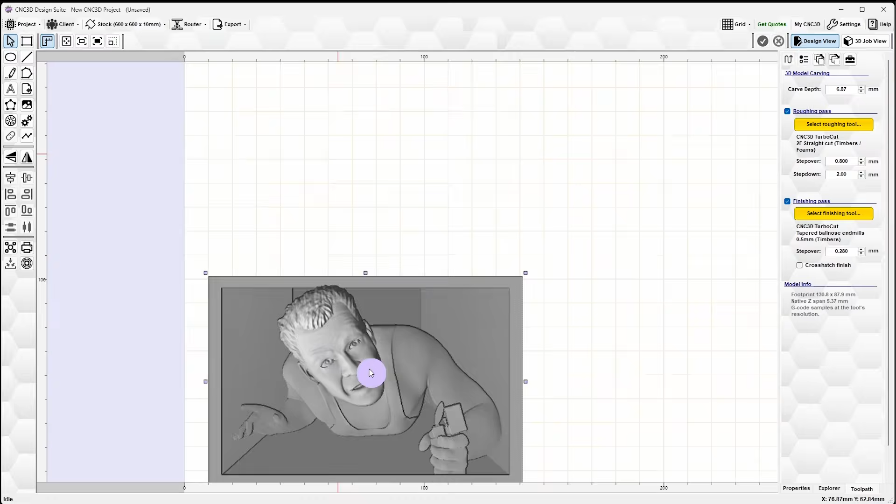Now we can pretty much go straight in and try to visualize this job right now. It may take a little while to render the preview for you because what I'm doing is I'm actually manipulating the STL, but that was actually pretty quick. So let's have a look and see what it's done. And as you can see, this is the actual toolpath here, so it's come along and you can see it's really done a good job of being able to render this.

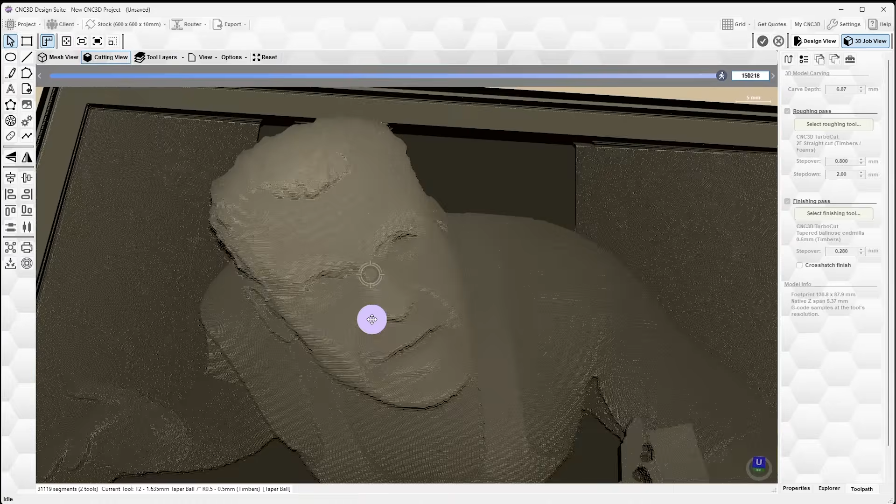Now the overall result should actually be even a little bit better than this overall visualizer here because I've tried to make these a little bit more efficient. Now if we go back into design view, that is very cool that we currently have 3D carvings coming very soon. But I also thought I'd go the next level.

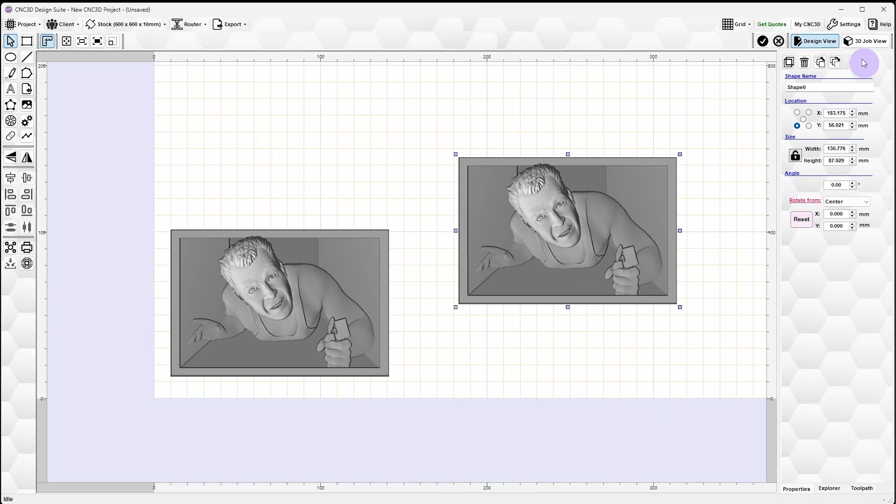So basically I'm going to copy this shape and I'm going to paste it. Now you can obviously choose to, if we go into the properties tab here, we're just going to show the rotation start point, just going to drag that there. You can obviously choose to do any sort of rotation, and you can import basically as many of these models as you'd like.

Now rather than having a separate tool for manipulating the models, I've actually tried to keep things fairly simple. So what I'm going to do is I've obviously applied this rotation, I've obviously shrunk this down a little bit. Let's just go into the Toolpath tab and let's make this say 8mm, so we'll make it even deeper than the other one.

And now let's go into 3D job view. Now this may take a little bit longer to load again. Obviously for each of the 3D models that you do have on your canvas, basically it's going to take time to render those toolpaths because it has to create them. So we'll just see how this one here comes out first.

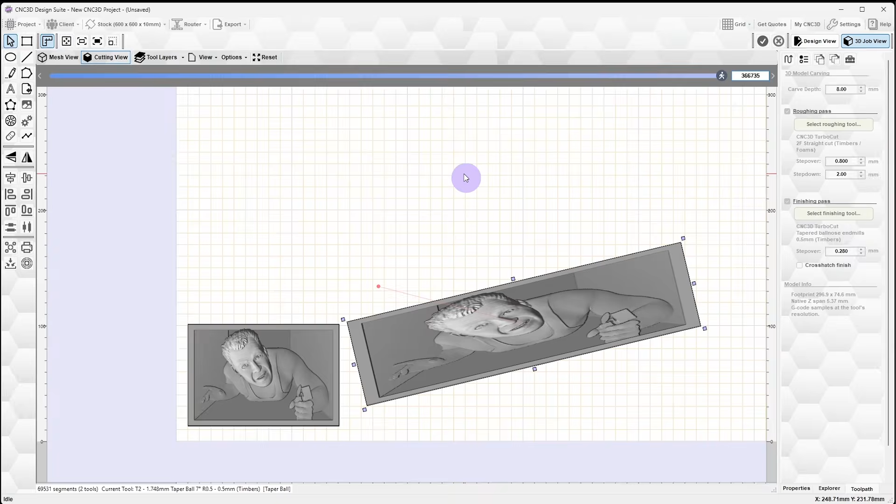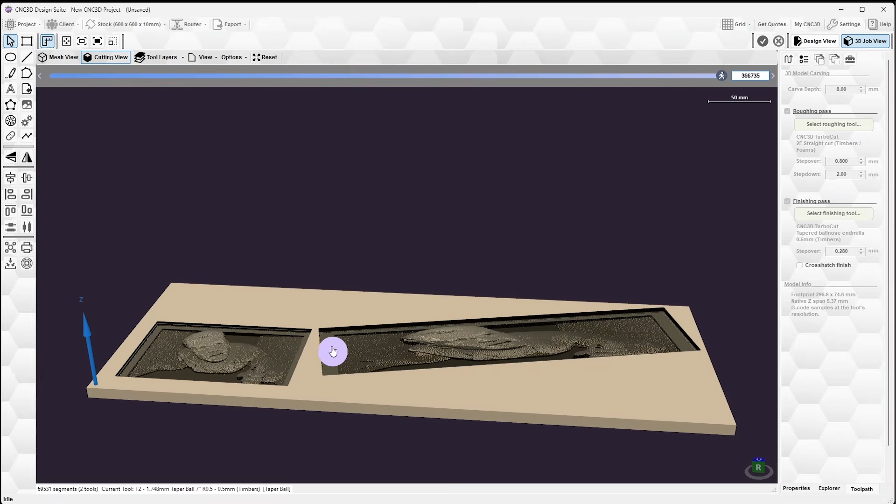And there we go, so that has actually gone ahead and done that for us now. And you can see that it's actually obviously shrunk that down. And if we look at our heights, you can visually see the height difference between the 6mm one there and the 8mm one there, so there is actually a discernible height difference there between them. So it will basically do that 3D carving for you exactly as expected, and you can place as many of them down on the canvas as you want.

Now let's go back into design view here. And what we'll do is we're just going to load up a slightly different project.

It's going to make this a bit easier. I've got this standard router test job here, and I'm just going to flick this into router mode. So this was a jumble of shapes that I used to help me create the toolpathing, so that the way the shape should work is what you see is what you get.

Lighter colors are shallower, darker colors are deeper, and they should respect their overlapping position on each other.

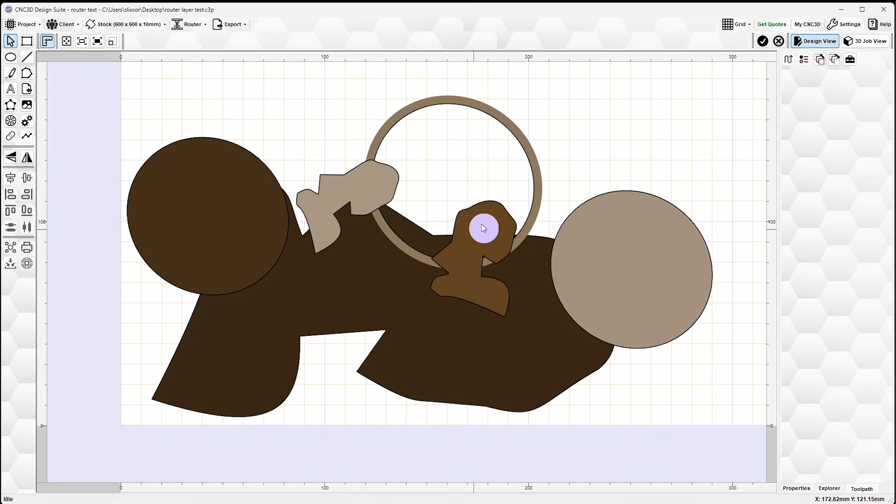Now, what I've actually done is, by default, you've obviously got the ability to choose the type of toolpath you want. But what you can do is in router mode, if you go into router and change the user mode from simple, you can now change that through to advanced.

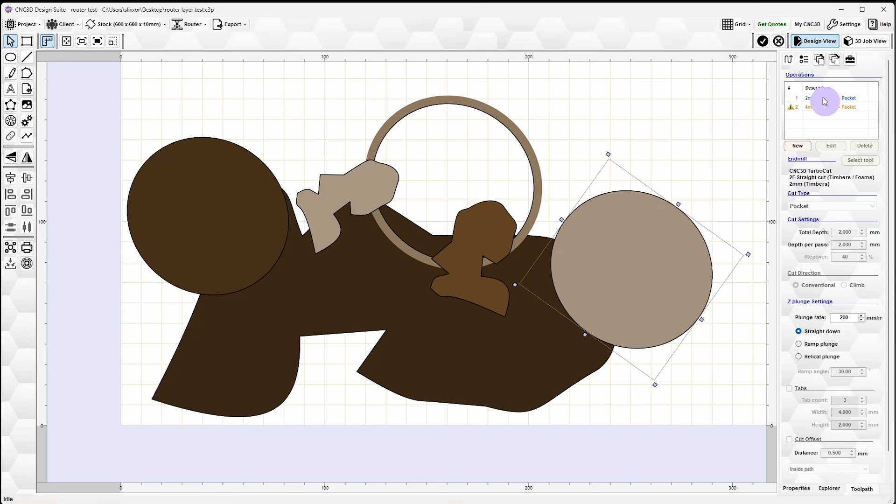And then when you click on any one of these shapes, it will give you a number of toolpaths. If I hover over this one here, it says it's a redundant pocket because we already have another pocket above it. When you click on these, it will change the actual toolpath to the color you'd like. So in the case of something like this profile cut, you can see there's actually 3 tools here.

And these wireframe lines are designed to represent all of those toolpaths. Now, the black line here is actually the boundary of your shape, so that's the actual shape boundary. And if you deselect that, you can see that black line there.

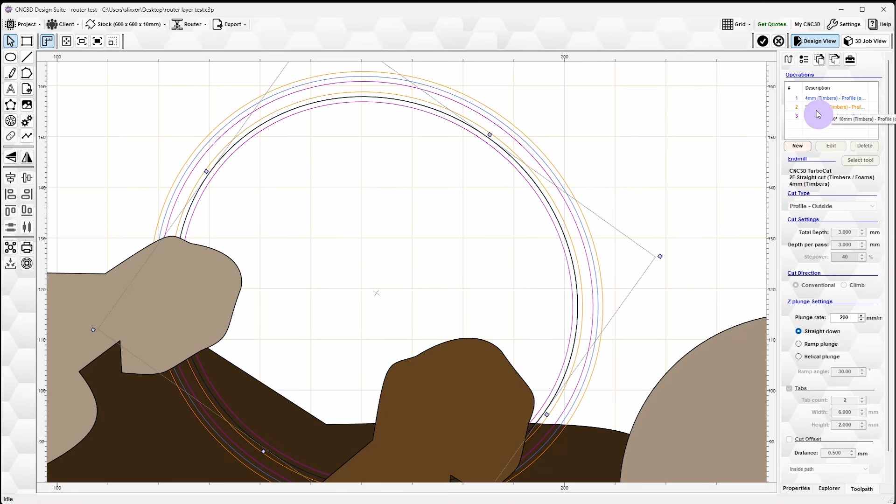Now, what I've done is I've used these two 90-degree V-bits here, and I've positioned them offset from these. If I click on one of these, you can actually see that it is in fact a V-bit gradient. This is designed just to give you an idea of what the toolpath is actually going to look like and how it's going to go in relation to the other toolpaths around it.

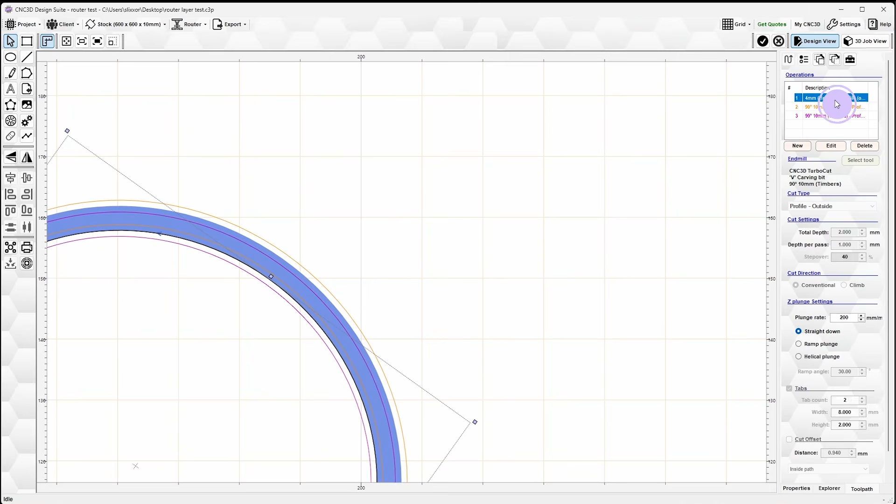Now, the reason why I've done this 4mm profile here and overlaid these other two is when you go into the visualizer—and we'll just let this load, it may take a little while—basically, it's going to use a 4mm 2-flute straight cut, which is going to do that profile cut.

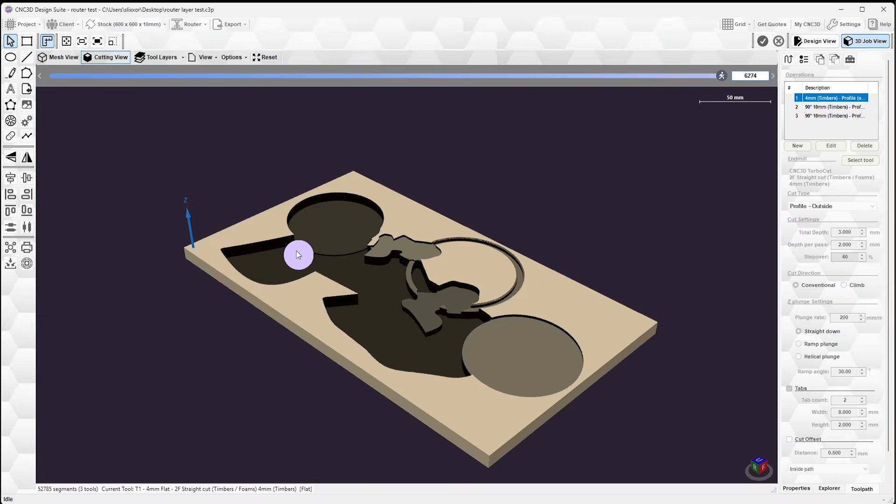And then you'll need to do a tool change to a 90-degree 10mm V-bit. The reason why is once this actually loads up, I've basically tried to chamfer the corners on here. So if we have a look at how it's displaying, you can see that it's overlaid those other two 90-degree V-bits, and that's how we've managed to actually follow around this after we've cut this profile. That's exactly what it's meant to do.

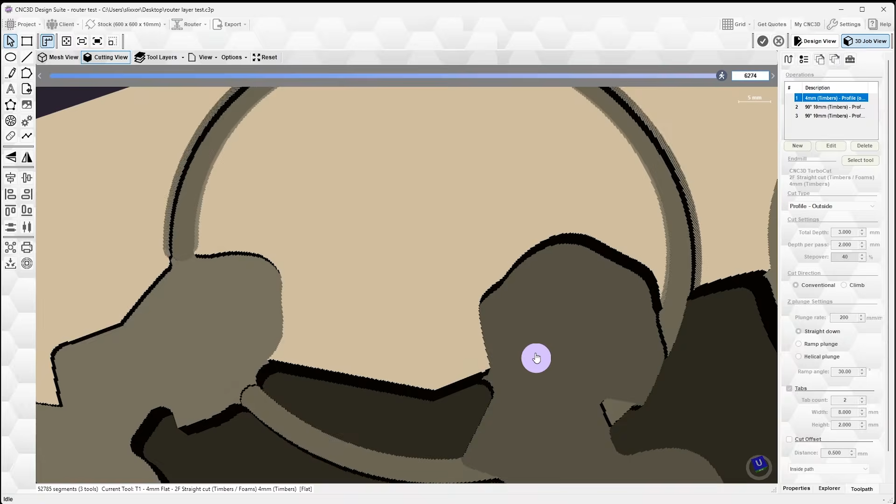Now, when I said about what you see is what you get, look, I've done my best here that I possibly can. But if you look at some of these artifacts, like this piece that's just here, and where this line is coming around, if I go in there, you'll notice that is actually part of the job. So that's this section just in here that you were looking at versus these parts just here.

So in essence, it's always going to try to do whatever the first toolpath is that appears at the top here. It's going to try to respect that amongst all of these other shapes. Then any other toolpaths that occur beyond this point, like operation 2 or operation 3, it's going to do those separately at the end once it's done all of its first toolpaths here and made sure everything complies to the same standards, so it's based first on the layer of the shape, then it's based on its actual toolpath, and it's based on the first toolpath.

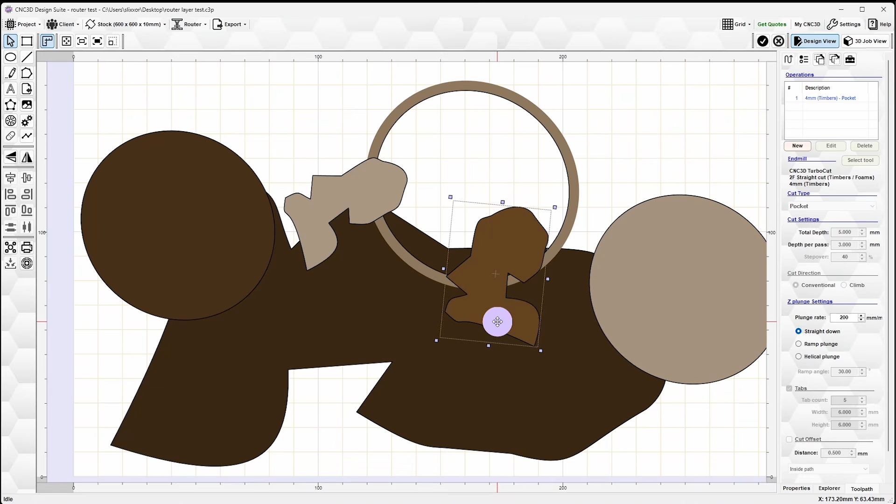So this was the easiest way that I could kind of reflect this for you. Now, please, for those guys on dev, if you'd like to give me some feedback on this before we launch it, please do. But basically, this should all be backwards compatible for your existing projects as well.

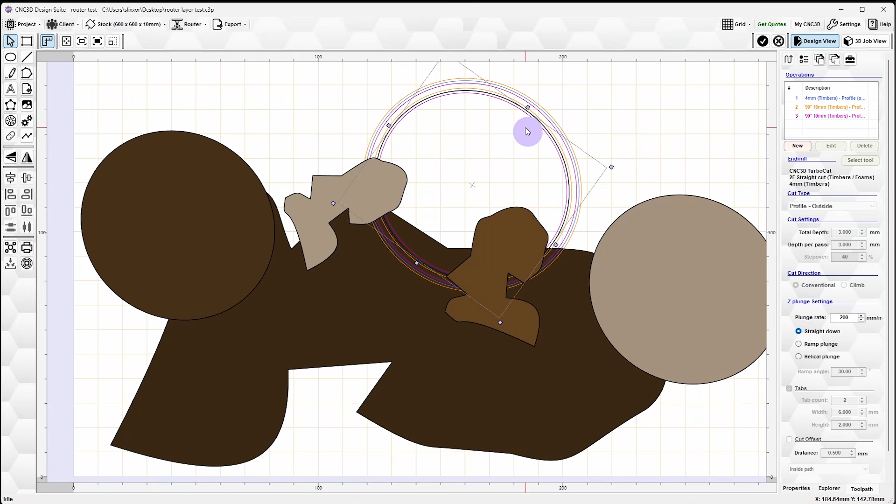I just wanted to show you some of the awesome new stuff that will be coming out very, very soon. We are hopefully aiming to launch this in June 2026. So today's date is the 10th of June, but worst case is she'll be out in July.